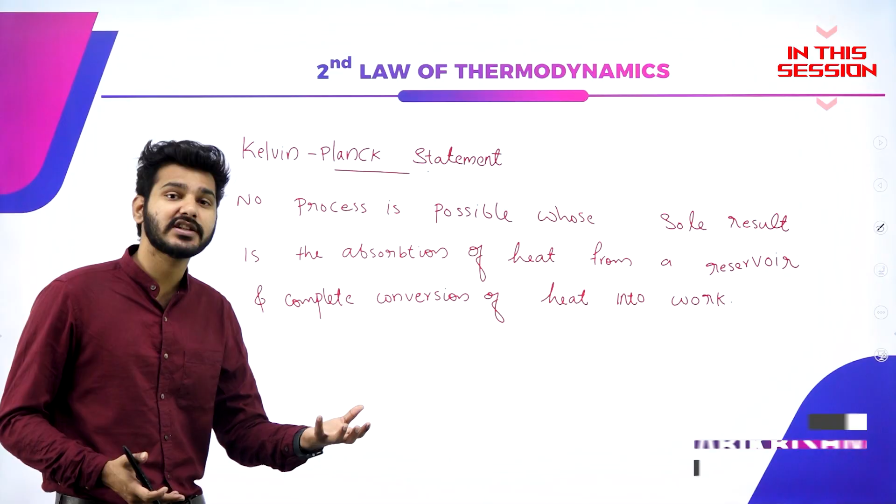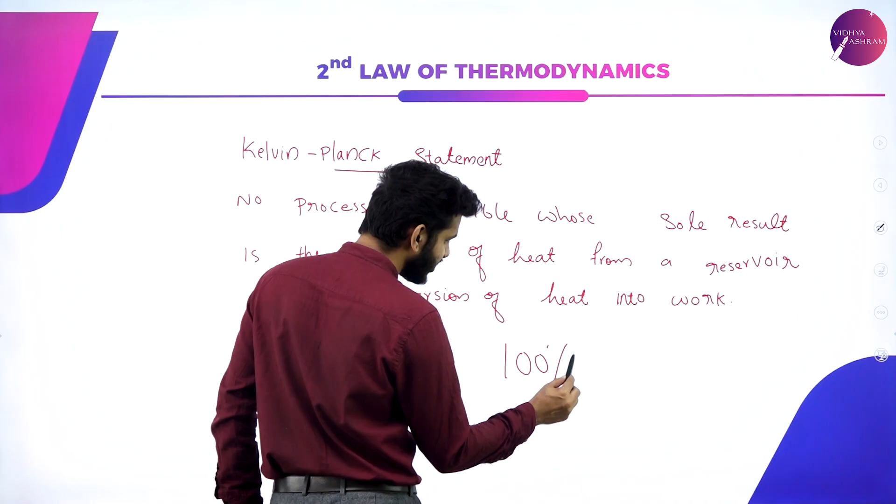That is, 100% of energy cannot be converted into 100% of work. That is, if I give 100 joules of energy, then I cannot expect 100 joules of work to be done. That is because energy will be dissipated.

Like if you give chemical energy to, let's say, a car—you're giving petrol, or let it be an EV car, so we're giving electric energy to that particular EV car. Then what happens? That electrical energy, if you're giving 100% of electrical energy, it is distributed to the motor. When the motor is running, it is actually converting that energy into mechanical energy, but it is not 100% converted. A part of that energy is lost as vibrational energy, frictional energy, sound energy, and other forms of energy.

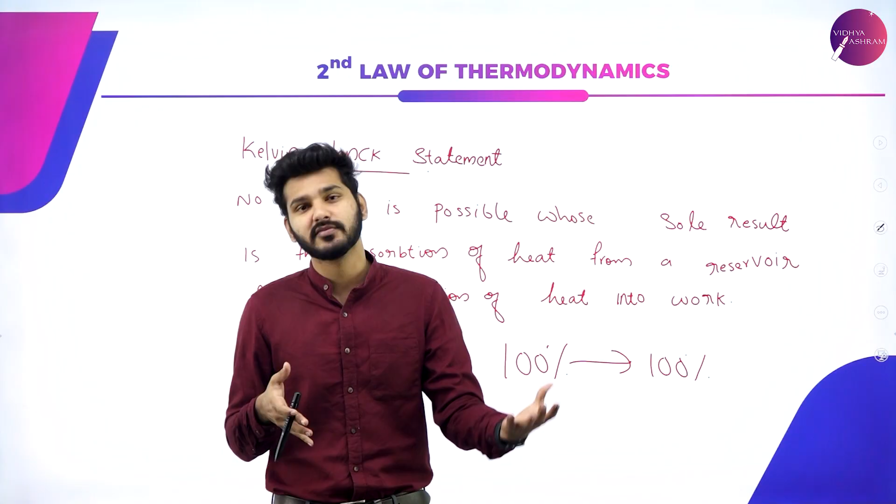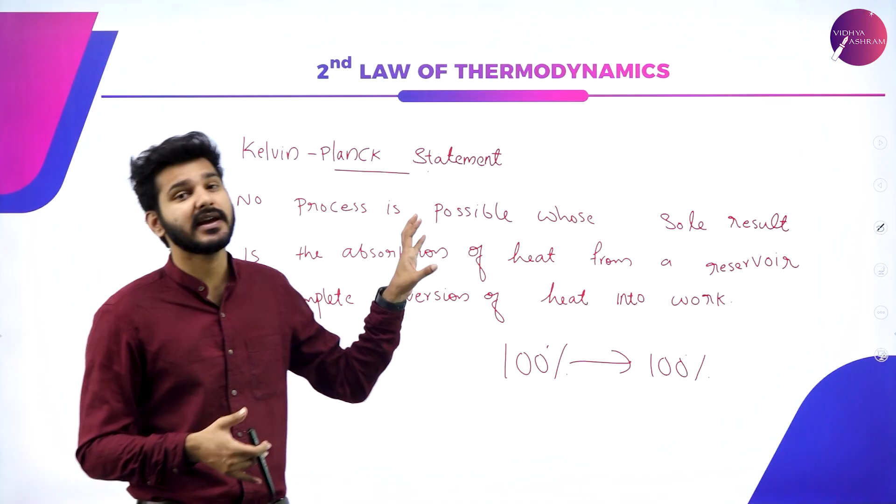So basically, when energy is given to a system, the system cannot use 100% of that energy to do work. There will be different forms of losses, like heat energy dissipation, which is one famous form of loss. So energy cannot be 100% converted into work done. That is explained using this particular statement, the Kelvin-Planck statement.

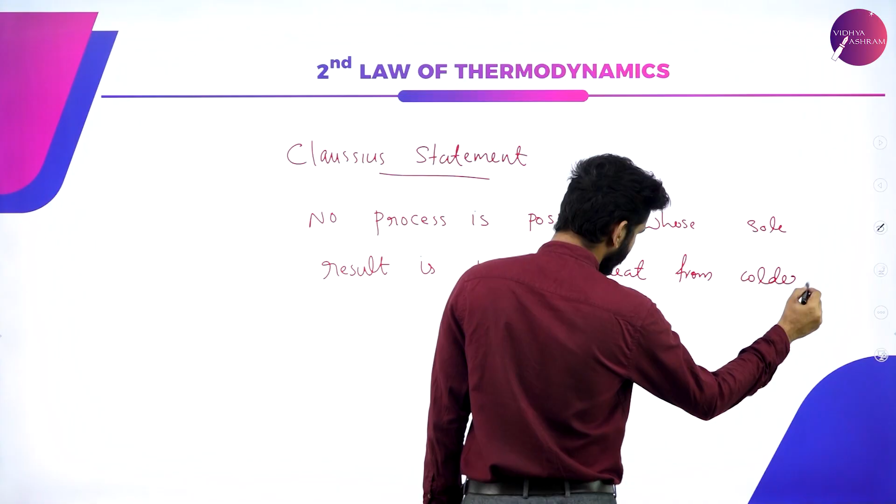And the second statement is known as the Clausius statement, found by Clausius, who stated that no process is possible whose sole result is the transfer of heat from a colder body to a hotter body. That is, if there are two systems and there is a difference in temperature, heat will always flow from the higher temperature to the lower temperature.

If there is a gradient, that is a difference, then heat flows from higher concentration to lower concentration, and the reverse is not possible naturally. We can induce that, like with an AC system, where we can reduce the temperature of a room again and again, but that is by using the compressor and mechanical arrangements. Naturally, it is not possible—heat only travels from higher concentration to lower concentration, and that is known as the Clausius statement.

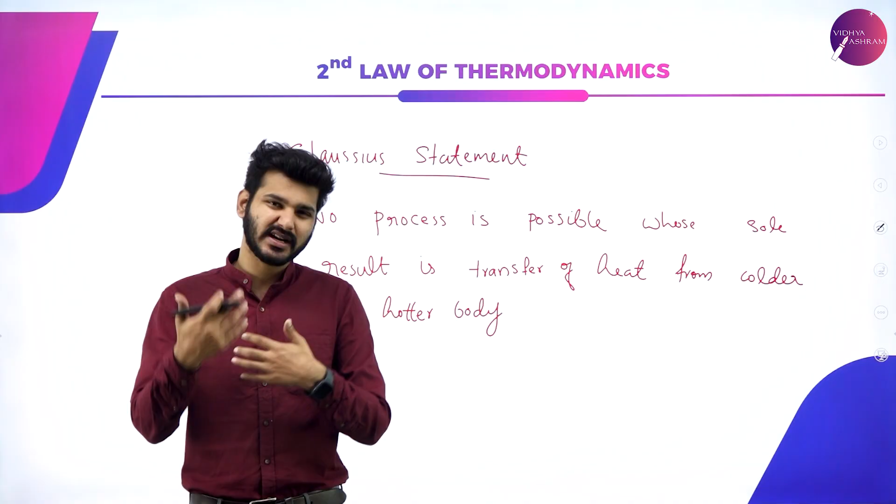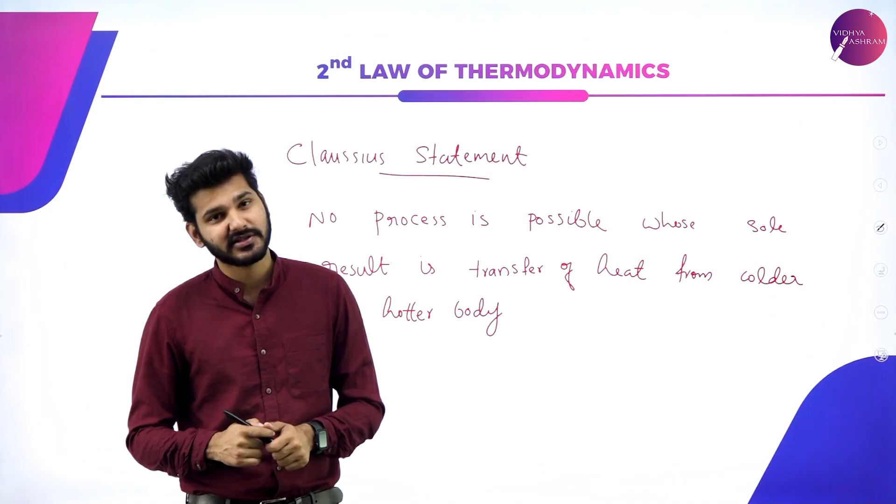So that is enough for you. We don't have to dive deep into the world of entropy, because entropy itself is a very huge topic, so we don't have to dive deep into that particular statements right now. So that was all about second law of thermodynamics.

Now what is reversible and irreversible process? You know that there are many processes, and some are reversible, some are not reversible.

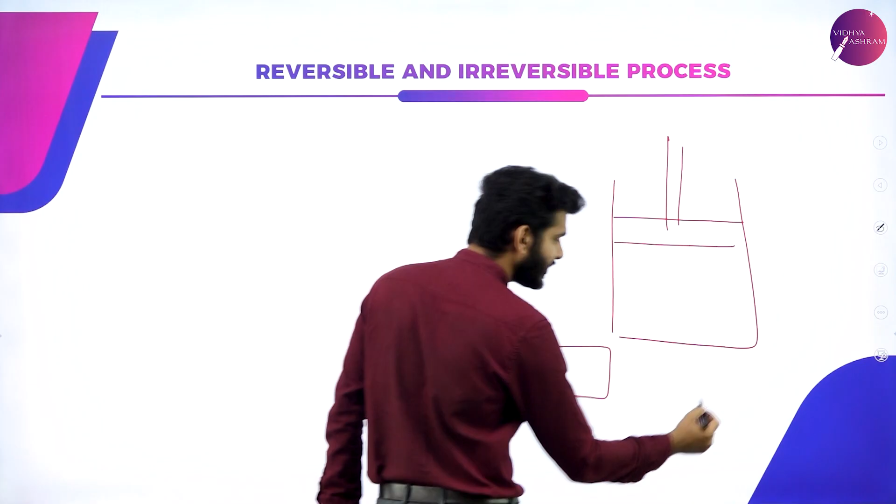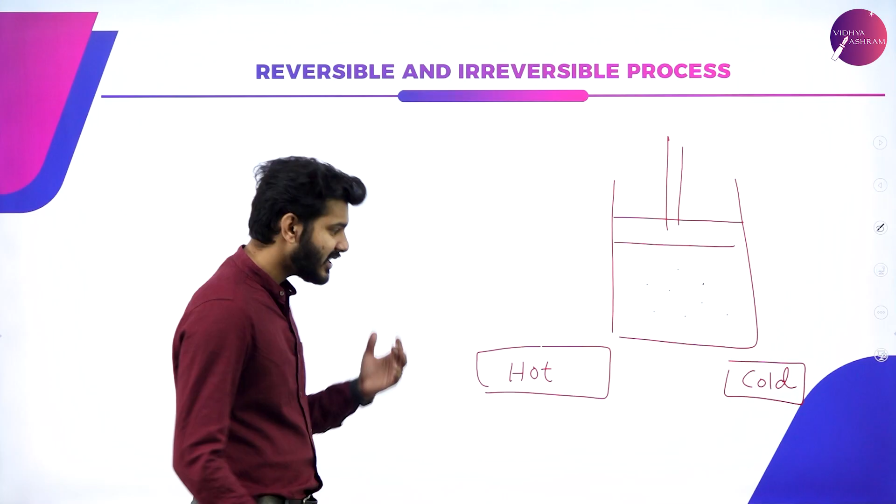For example, if I have a piston arrangement like this, and if I have two bars, let's say this is a hot bar and this is a cold bar. Imagine that this particular cylinder is filled with some gas. Now, if I keep this hot bar under this piston, what happens? The heat from this particular system, that is Q, is absorbed by the chamber, and the gas expands, which means the piston will go up.

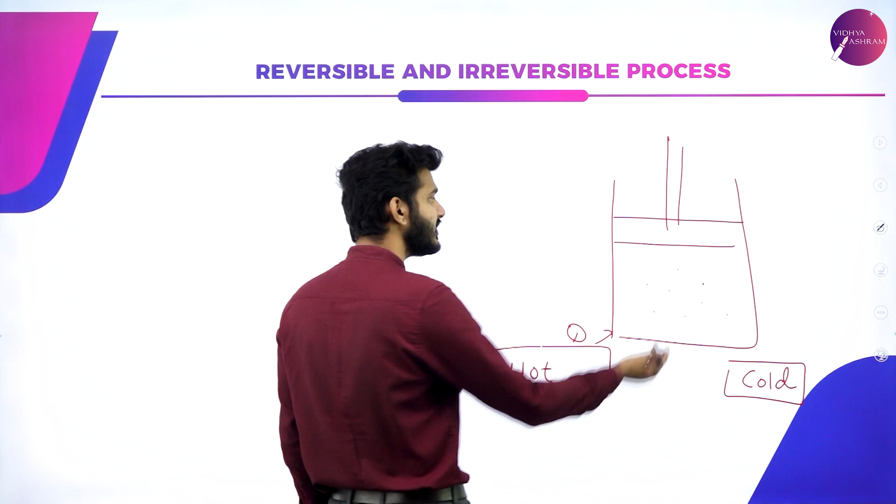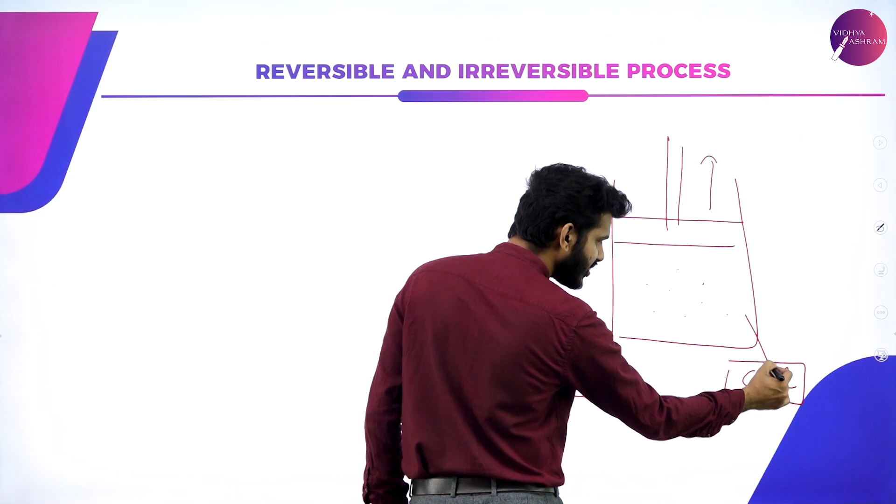Now, immediately if I switch it to a cold bar, what will happen? Then heat from this particular system will reach the cold bar, because of the fundamental laws of thermodynamics, and immediately the piston will come down as the gas compresses because it is losing its energy. The hot bar will give it energy so that it can expand. The cold bar will take away energy from that particular chamber so that it compresses.

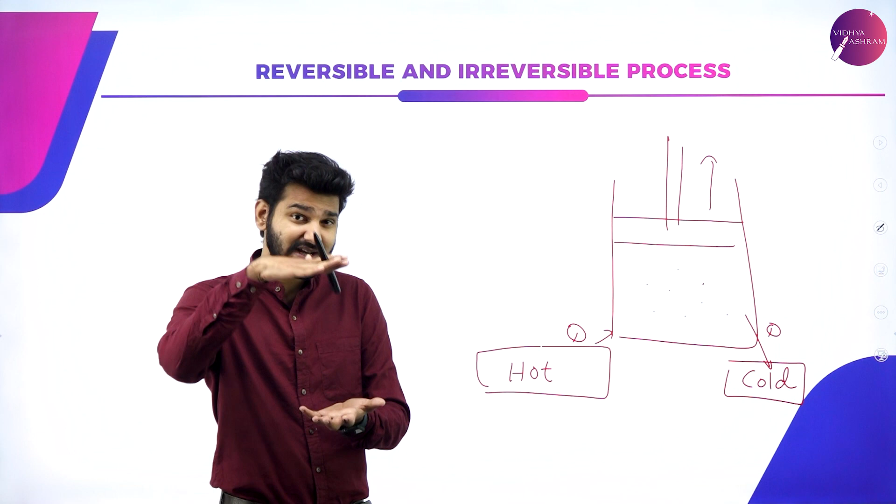So I'll keep the hot bar, it expands. Then I'll remove the hot bar, keep the cold bar, and it compresses. Right? So that is a process that is happening here.

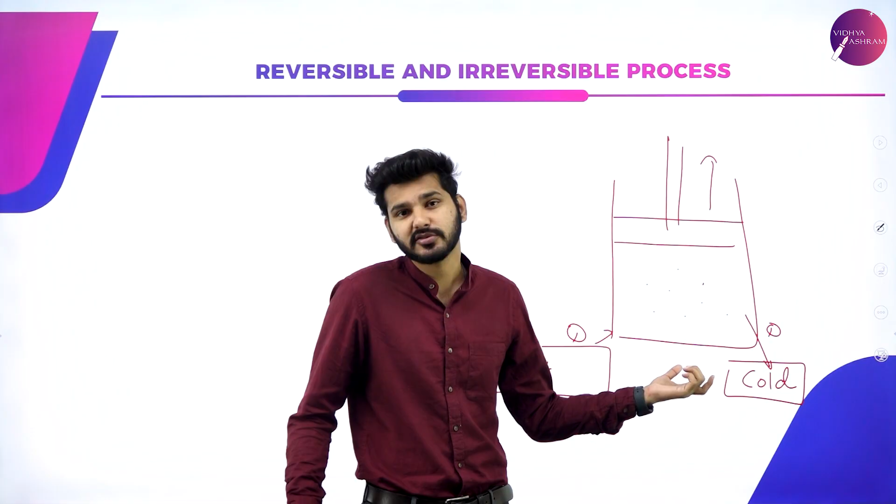Now tell me, if I reverse that particular order, instead of keeping the hot bar first, what if I keep the cold bar first? Then again it is possible, right? Because even if I start from the cold bar, the same thing happens. Again, it compresses. If I give the hot bar, it goes up. So that particular process is reversible. I can do it either in this order or in this order.

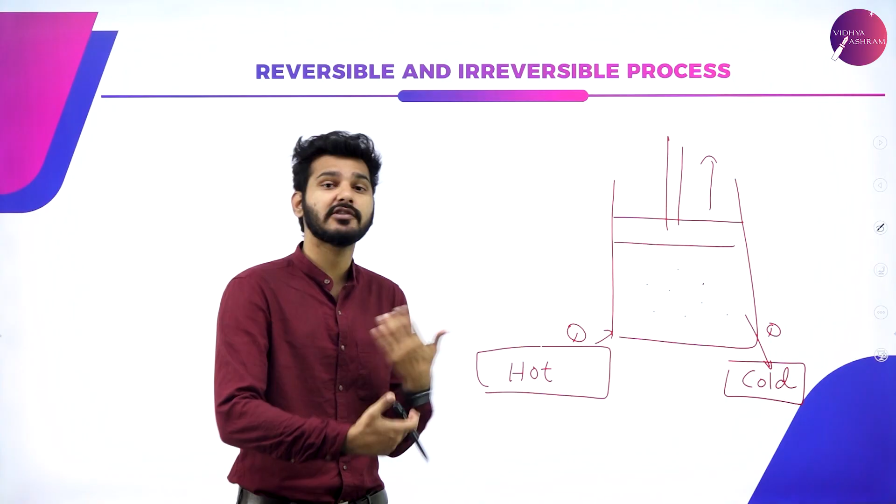Both are possible here. So that kind of processes are known as reversible process, and which is not possible, like if I burn a piece of paper, I cannot unburn it. So that kind of processes are known as irreversible processes.

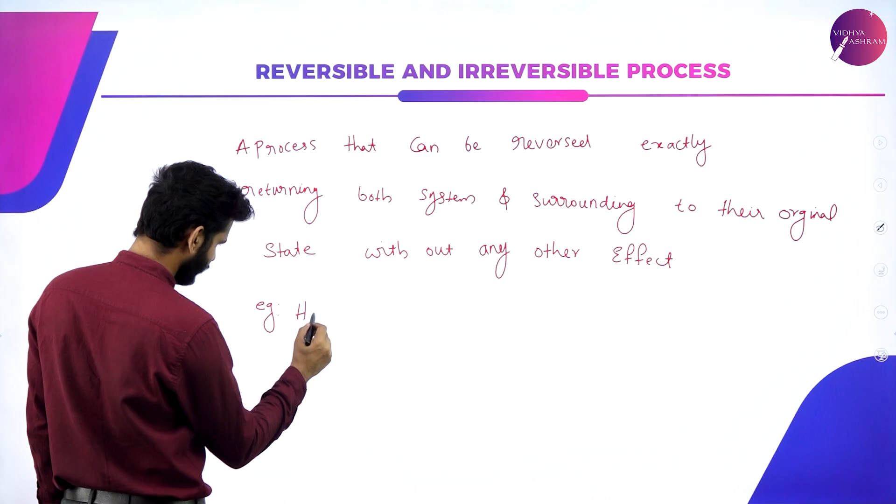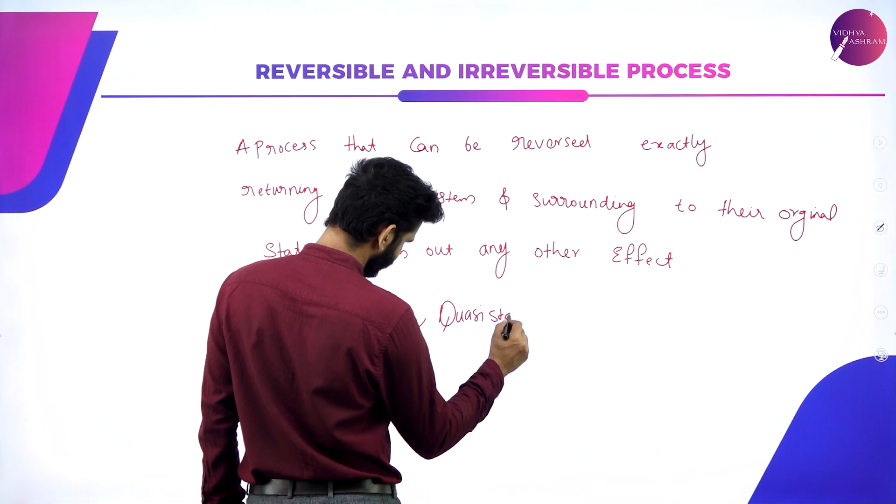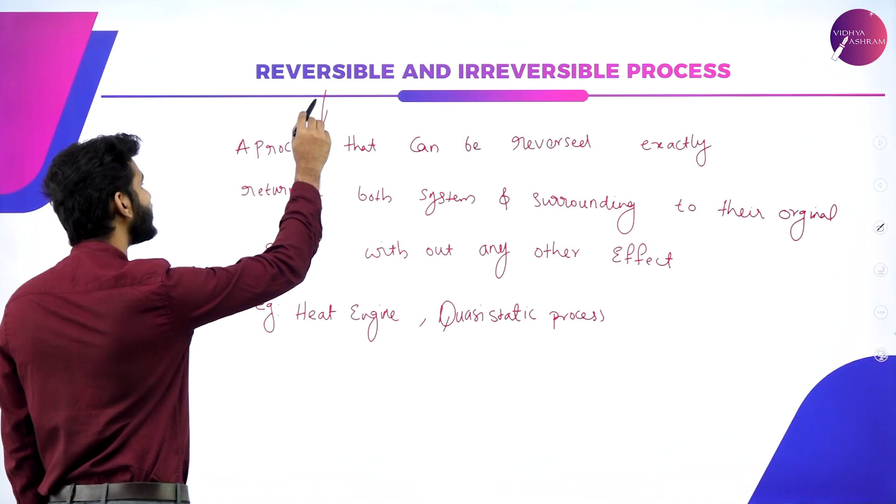So again, we can see that a process that can be reversed exactly, that is, returning both system and surrounding to their initial or original state without any other effect, then that is known as a reversible process. And if the system does not return to its initial state, that is an irreversible process.

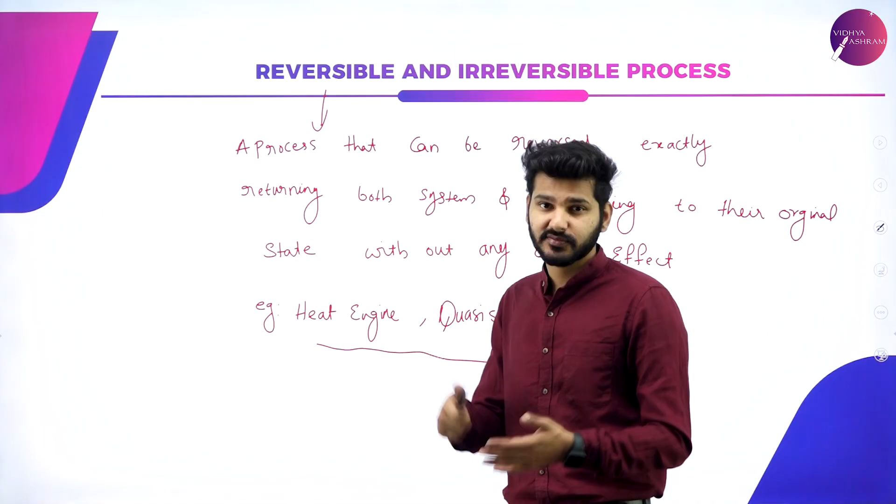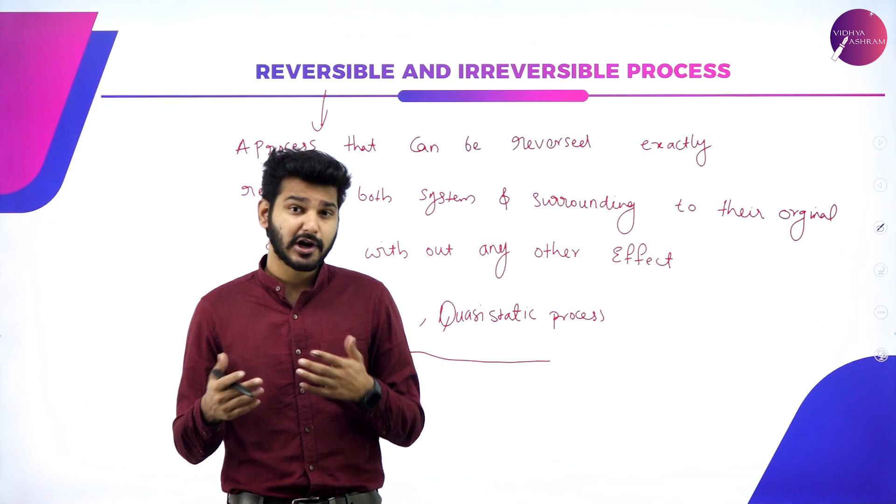The examples for reversible processes are a heat engine, which I'll explain, and a quasi-static process, that infinitely long process we studied about. And for irreversible process, we can say that all spontaneous processes, that is combustion and any other spontaneous process happening in nature, is an irreversible process. It is increasing the entropy. So we can say that all spontaneous processes are irreversible in nature.

So now, what exactly is a heat engine? A heat engine is something that works on the principle of thermodynamics, or simply uses heat to work. For example, you can imagine the engines, that is the steam engines that was used in earlier eras. A train used the steam engine to run.

You might have seen the choo-choo trains which was running on steam engine. Just like that, Titanic also was running on a steam engine. You can see big boilers and steam coming out of it. So that was also running on a steam engine. So all these were based on the heat engine principles.

So what exactly is a heat engine and how is that related to our thermodynamics chapter? Just before, I showed you an example where the piston goes up and down when it came into contact with something hot and something cold. So that particular process itself is the working of a heat engine.

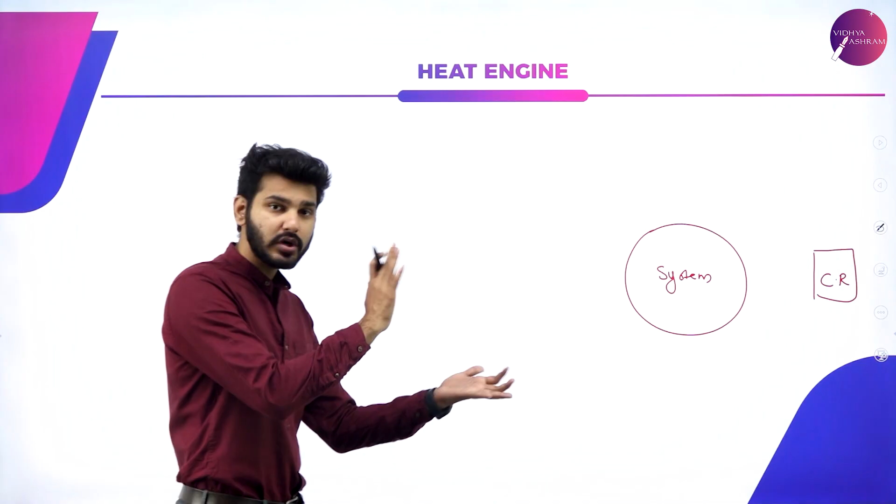If you have a system like this, let's say this is your system, this is your cold reservoir, that is your cold part, and this is your hot reservoir, where heat is being supplied, then we can say that the system can absorb Q1 amount of energy, or Q amount of energy, from this particular hot reservoir, and this energy will be used in order to do some work. That is, the system will do some work.

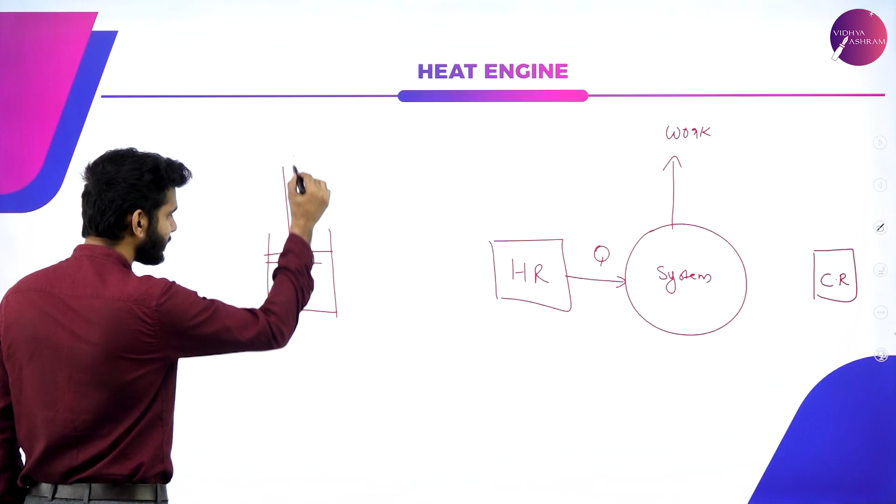Let's say this is the exact arrangement - this is a piston, and here it is filled completely with gases. I'm bringing a very hot body in contact with this piston, so the gases expand. When the gases expand, the piston moves up. If I connect this piston to some other arrangement in order to lift something...

To lift this particular load, if I connect this, then what happens? As the piston moves up, this rod moves and the load will be lifted. So just like that, I am doing work on the surrounding, or making the system do a particular work, and that is achieved by giving energy to this system.

So again, I can say that the hot body gives Q amount of energy to the system, and that energy is used to do some work. Now, this is going up, but I want to put it down now. So what will I do? I have to move the piston down.

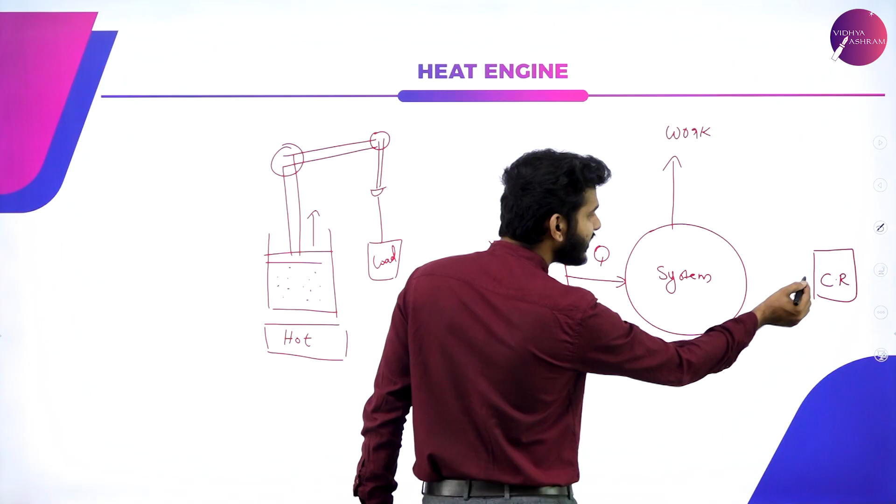So what can I do? I have to compress the gases. That is where the cold reservoir comes into play. It absorbs energy from this particular system. The system now gives Q dash, or Q1, amount of energy to the cold reservoir so that the entire piston compresses.

So the system gets energy from the hot reservoir, goes up and does some work, and then when you bring the cold reservoir in contact with the system, a certain amount of energy is absorbed by the cold reservoir and the piston comes down. This process can be repeated, so you have a perfectly good working engine.

But the only problem is that this is an ideal engine, because you don't have perfect temperature to produce that effect. Yes, you can heat a system to 2000, 5000, or 10,000 degrees Celsius - that's fine, you're heating it so hard it goes up a really long way. But to produce that perfect temperature exchange, in order to bring the piston down, it should compress really well, meaning a perfect level of coldness should be supplied.

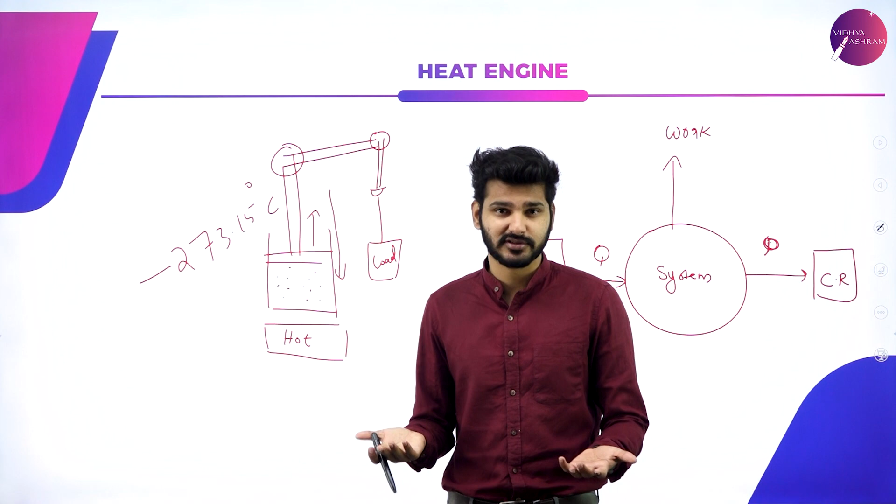That is absolute zero - that concept also came from this heat engine. So the concept of absolute zero is not practically possible, because the absolute zero value is minus 273.15 degrees Celsius, and that is not really attainable. Zero degrees Kelvin is not attainable by our standards, and it is very difficult. So it is not practically possible, but theoretically it is a very good engine.

This was actually found out by Carnot - he was a French physicist, and that's why this is known as Carnot's engine, which we will study very soon. The working of a heat engine, this concept, was observed and tried to be applied by Carnot, which he failed miserably, but again the concept was brilliant.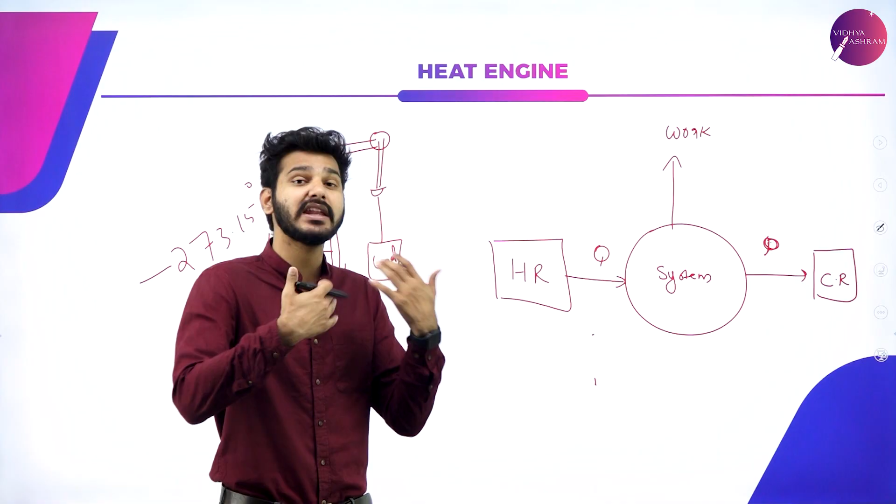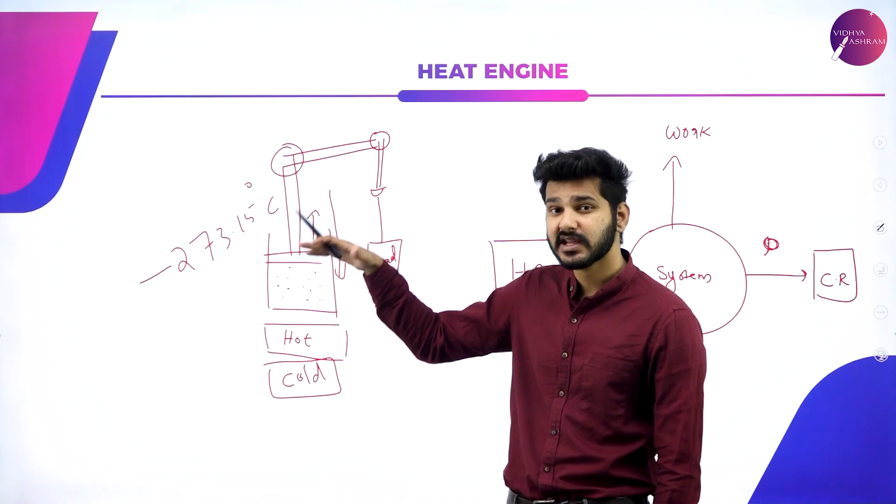Let's see how that process can be converted, or simply how he idealized how that heat engine would work - without any energy loss, how would that system work? Carnot imagined that the piston will go up and down if I keep on exchanging hot and cold baths, perfectly compressing and expanding the system. Then I have a very good heat engine, better than all the steam engines out there, because the steam engines provided an efficiency of only 16% or something.

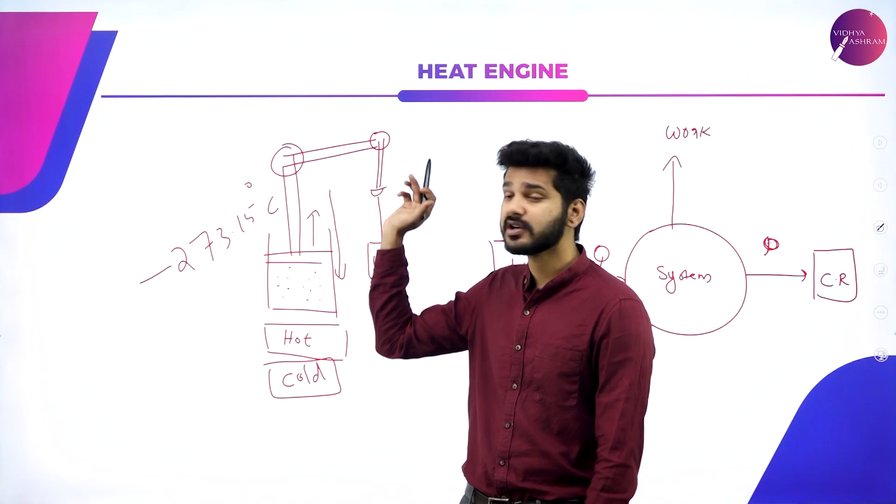So this heat engine would provide an efficiency of 100% because all the energy put into the system is now being converted into work. He forgot to account for friction, mechanical wear and tear, vibrations and other energy losses. So he assumed he'd disregard all of this because his entire energy would be converted into work - that was not actually possible, and even now that is not possible.

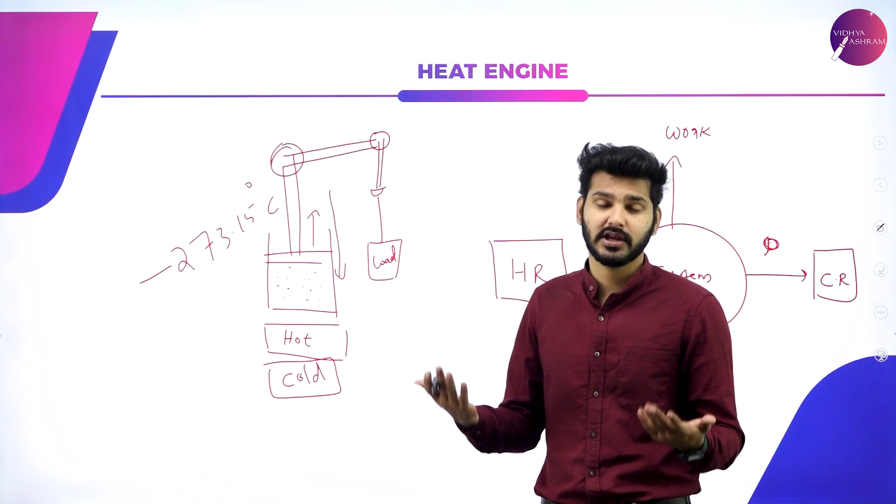But this was a theoretical concept which other scientists like Lord Kelvin also contributed to, and that is how the branch of thermodynamics actually bloomed. So how this system should have worked according to Carnot is what we are going to study here. Let's imagine we are inside Carnot's head studying how this system works - an ideal heat engine which converts 100% of energy given to that system into 100% work.

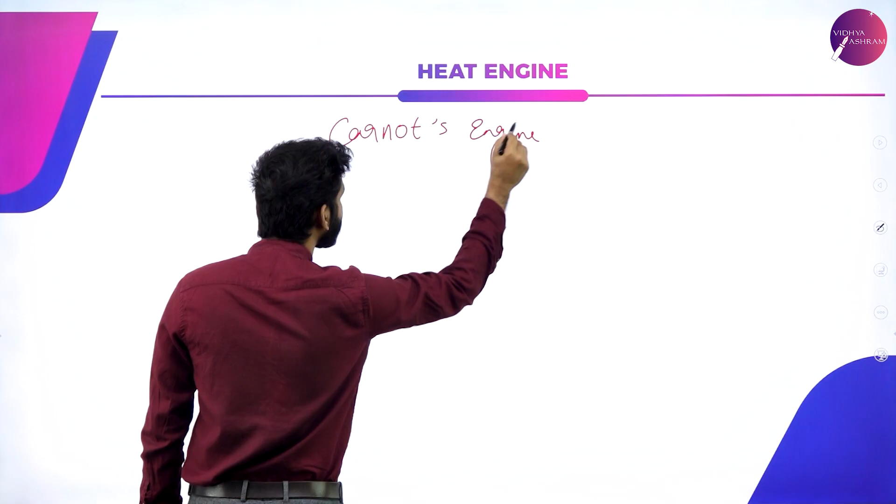So how does that ideal heat engine, or Carnot's engine, actually work? The first step is expanding the gas, and the expansion should be isothermal. So the first step in constructing Carnot's engine is that we have to expand the gas, and that is isothermal expansion.

So the gas is going to expand isothermally. The gas is absorbing Q1 heat from the hot reservoir at temperature T1, and it is expanding.

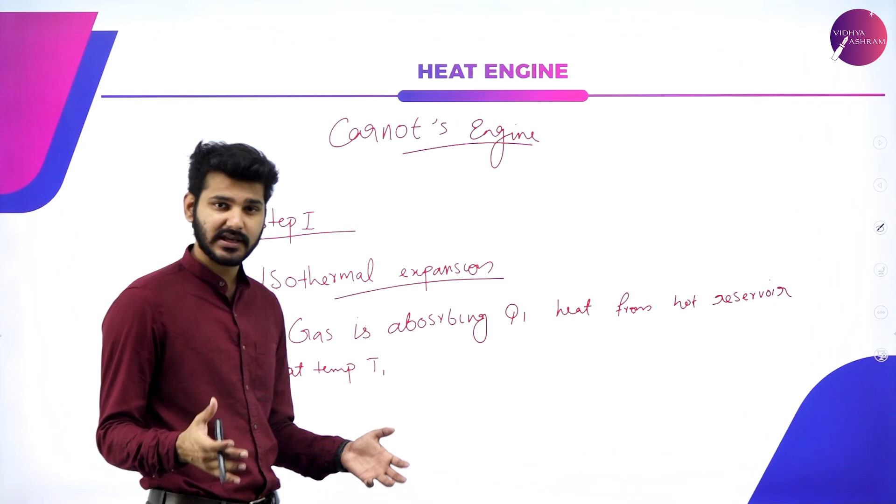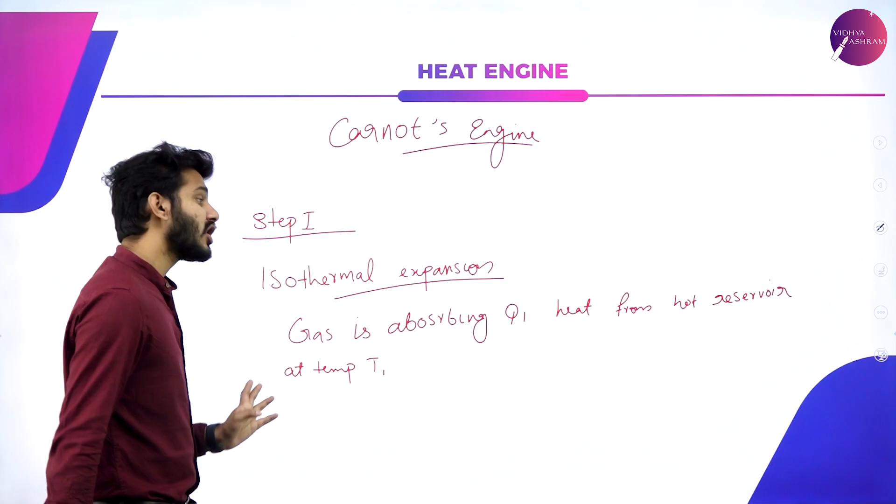So again, we are using heat to do work here. We are giving heat to a particular system and the system is doing work. Up to this point, we were doing work and getting energy instead. Now we are going to see how we can give energy to a system and the system is going to do the work, which means we can write down the equation for work done.

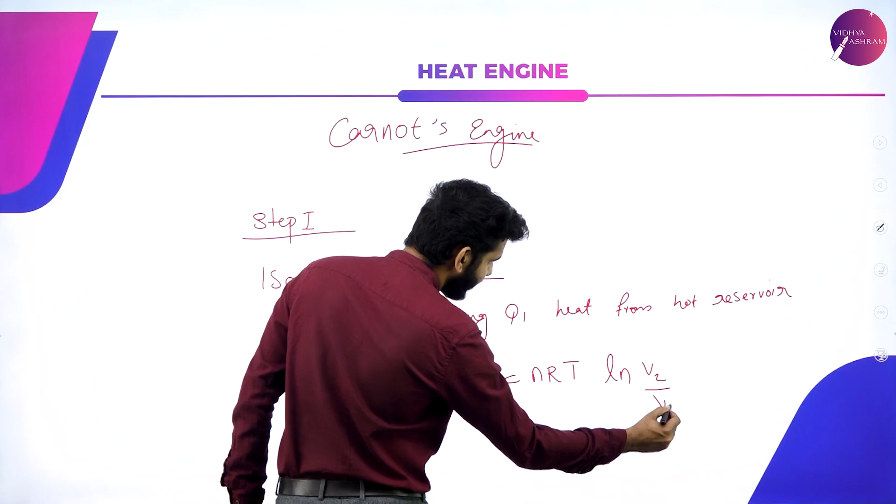That is the first work, isothermal expansion, given by the equation we studied earlier: nRT ln(V2/V1). This is happening at temperature T1, so nRT1 ln(V2/V1) is the equation for isothermal expansion.

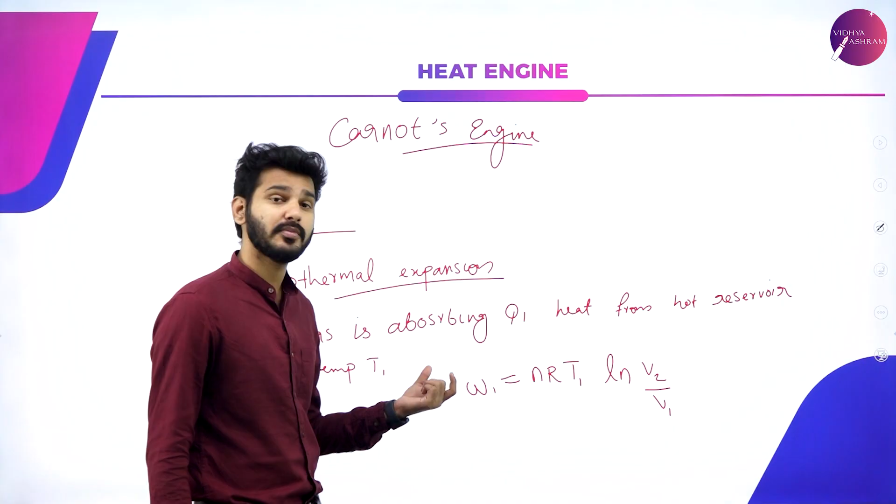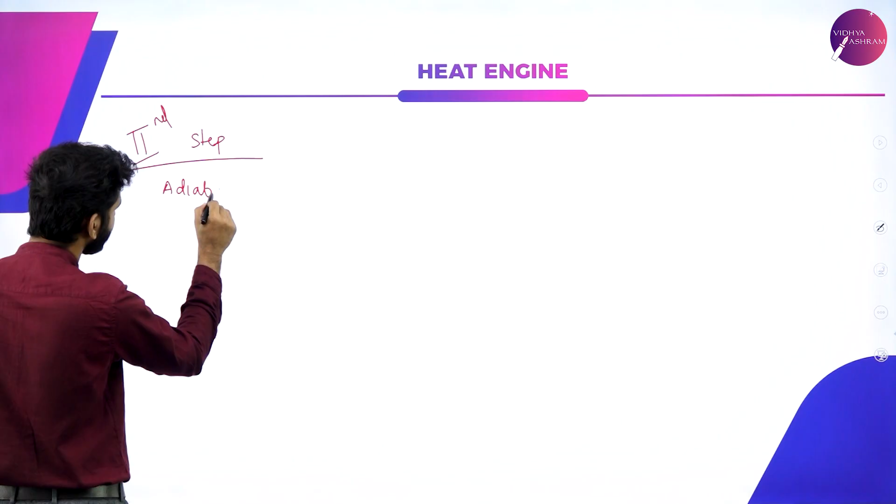The second step is adiabatic expansion, which keeps the energy constant. Now the gas is going to expand adiabatically, meaning the energy exchange is zero. The temperature is going to change, but the energy remains the same. Again, imagine we are going to predict how the system works.

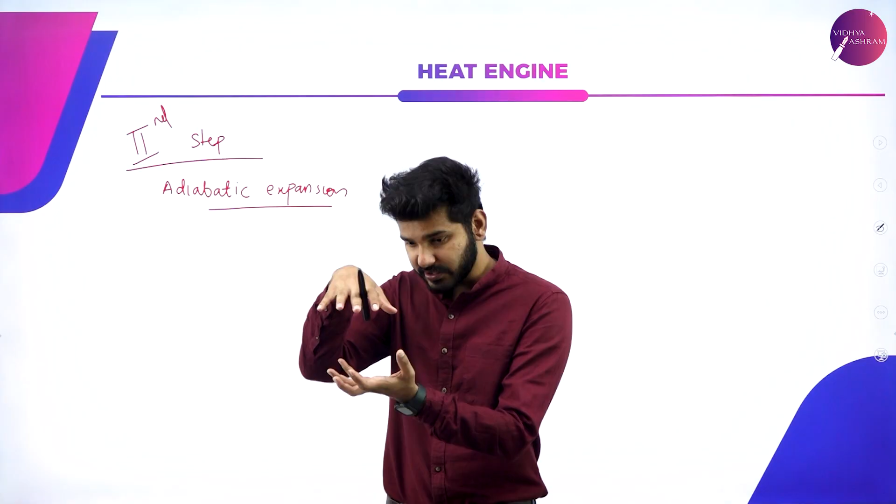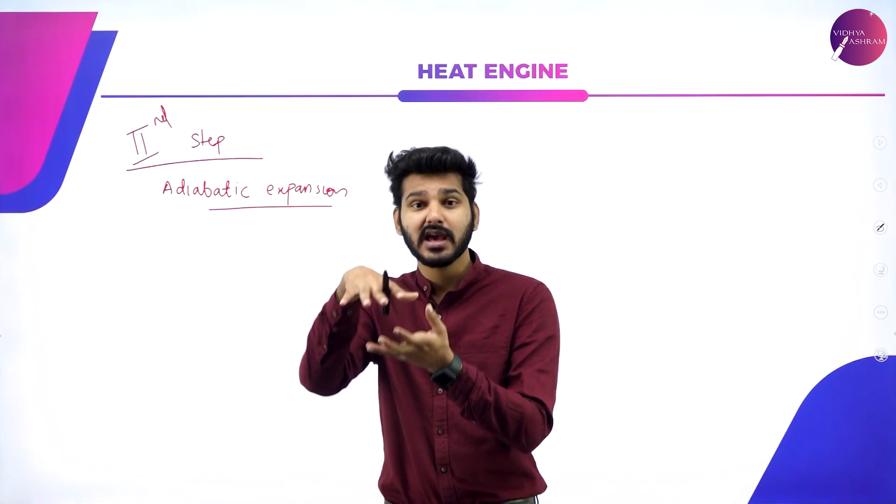There was a gas in a container, and when you apply heat to that system, it expands. That expansion was initially isothermic, meaning the temperature remains constant. It is a very slow process - an isothermal process. After that, it is an adiabatic process, meaning after expanding without changing the temperature, now we are expanding without changing the energy - the temperature is changing, but the energy remains constant. So that is the expansion part.

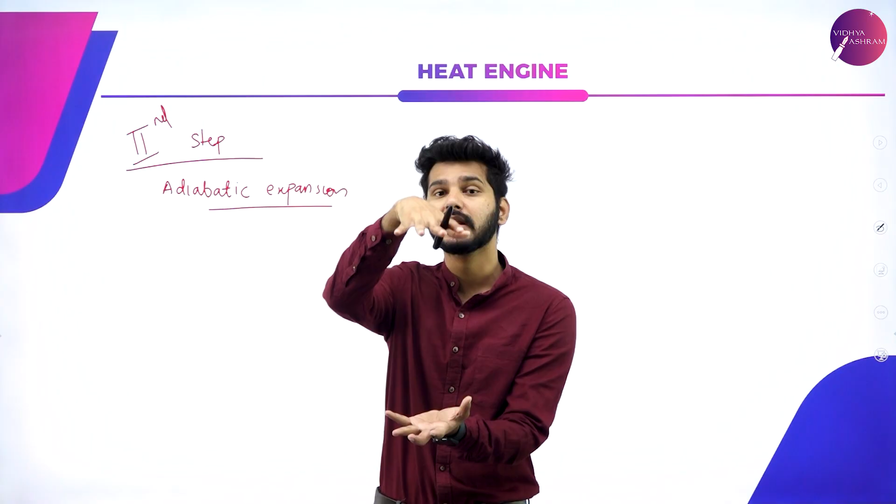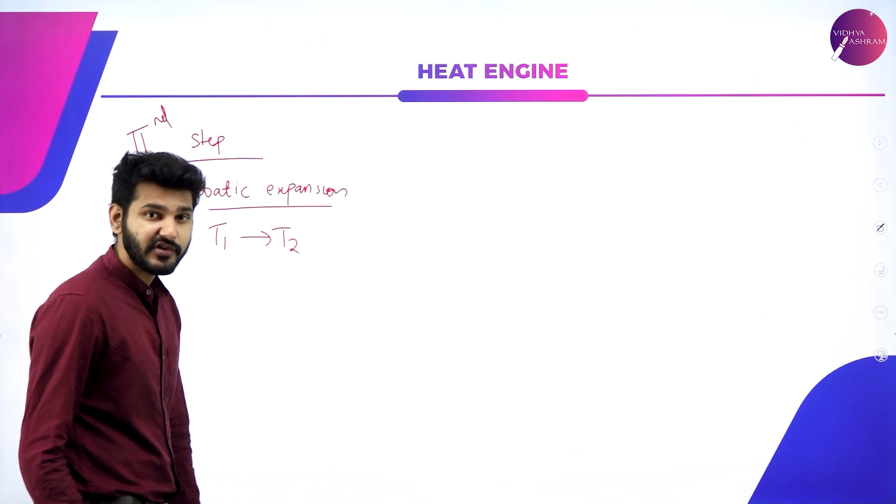So the piston is going up like this. Two processes are happening: isothermal expansion and adiabatic expansion. Here the gas expands adiabatically from temperature T1 to temperature T2, and again it is doing work. That work done is given by W2, which is equal to nR(T1 minus T2) divided by (gamma minus 1).

Now again, these two processes are about expanding - the gas expanded inside the piston, causing the piston to go up. That is half of the process. Now the piston has to come down, meaning the process has to repeat on itself. That is why the heat engine is a reversible process - you can do this either way. Both are possible. So the piston has risen up right now.

Now it has to go down, meaning the expansion part is over. Now it has to go to the compression part. How does that compression happen? Just like before, whatever happened this way, we are going to do the other way around - instead of isothermal expansion, now it is going to be isothermal compression.

So the third step is isothermal compression. What exactly is happening here? The Q2 amount of energy - initially Q1 energy was given to the system, some of that energy was used to do work, and the remaining energy, Q2 amount, is now given to the cold reservoir.

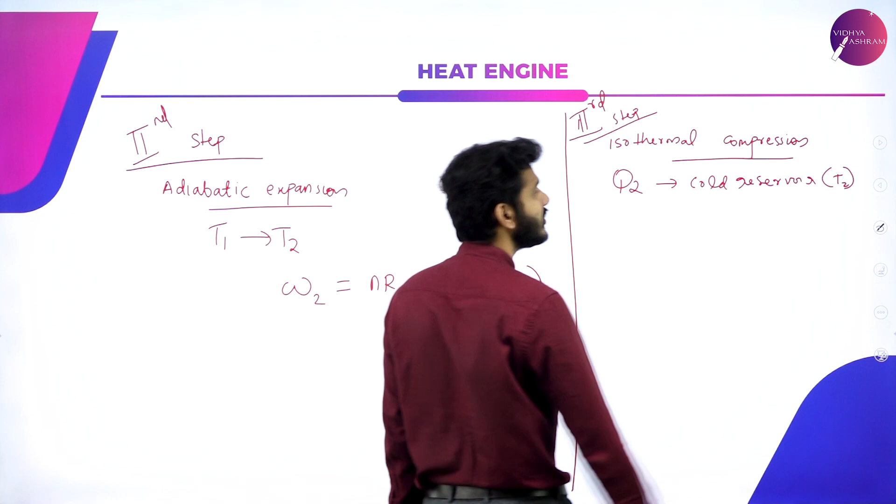Remember, when the cold reservoir is in contact, the piston is moving down. Q2 amount of energy is given to the cold reservoir, which is operating at temperature T2. Then we can say that work done W3 is equal to nRT2 ln(V4/V3).

Finally, what is the last step? That is step number 4: adiabatic compression. Again, in adiabatic compression, temperature is changing but the energy remains constant, which means the work done W4 will be equal to nR(T2 minus T1) divided by (gamma minus 1).

So these are the 4 equations for the work done in a heat engine. In our ideal heat engine, these 4 processes will be responsible for the work done - the piston expanding and compressing. What is all happening inside that particular piston? There is an isothermal expansion, an adiabatic expansion, then an isothermal compression, and then an adiabatic compression.

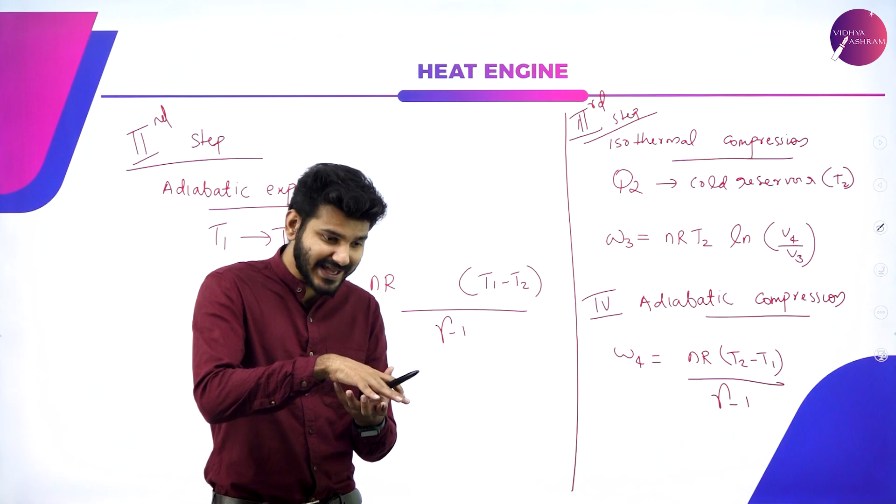When the energy is absorbed from the hot reservoir, the piston is expanding isothermally. There is an exchange of energy there, but the temperature is remaining constant. And then it is expanding adiabatically. The energy is remaining constant, but the temperature is changing. And after that, the piston has gone up.

Now it has to come down. So in order to make it come down, that is, the piston went up, did some work. Now the piston has to come down. So we introduce a cold reservoir. When we introduce a cold reservoir, there is isothermal compression. That is, energy is now given to the cold reservoir. Q2 amount of energy is now given to the cold reservoir, and now the temperature is same.

After that, when the energy exchange is over, we have an adiabatic compression. That is, temperature is now changing, but the energy exchange is no longer there. So that is the entire process of a heat engine. So essentially, we have different forms of work here, that is W1, W2, W3 and W4. And if we add all these individual works together, we will have a net work that is done. So we also have to find out what is that particular net work done.

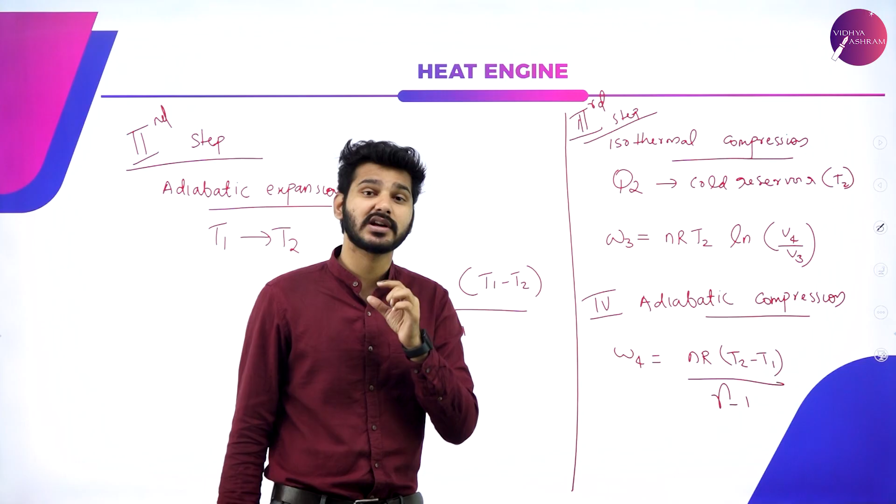But before that, graphically also we can represent this particular process. So if I draw a graph, that is a PV graph, because P delta V is again work done, or PV is just work done in thermodynamics. So any area under this graph will give work done. So we can use a PV graph in order to represent what happens inside a heat engine.

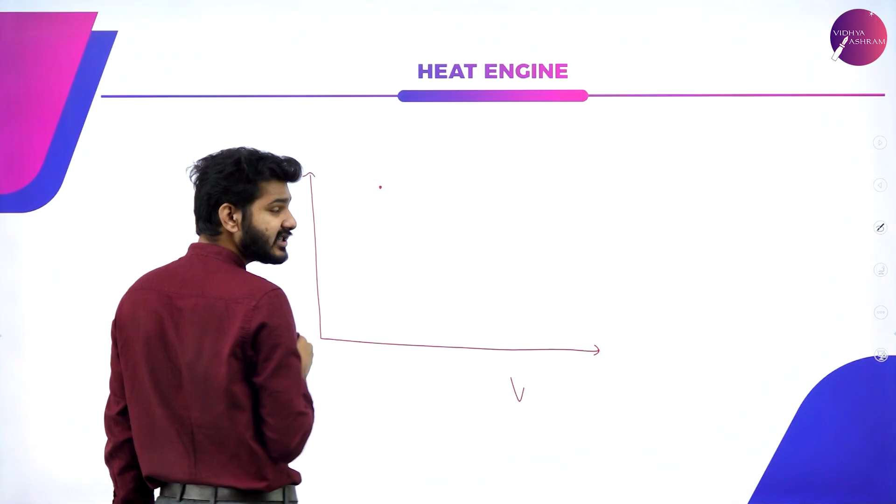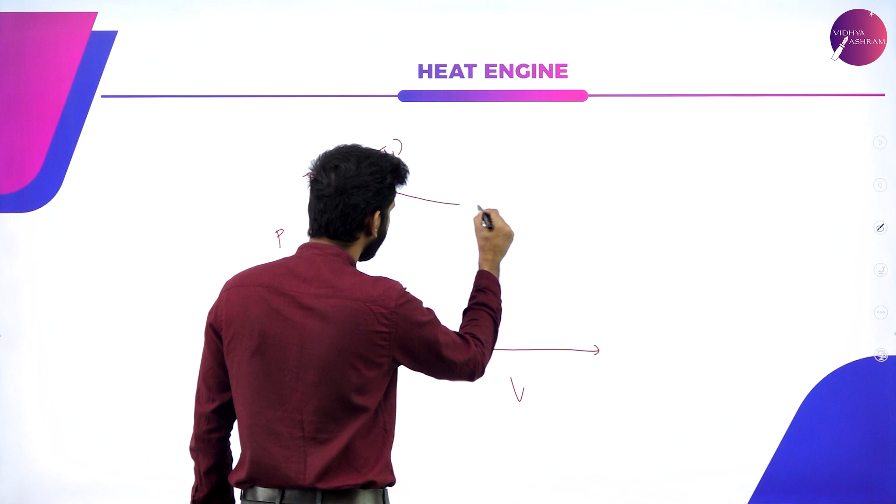So what happens initially? Initially it is isothermal expansion. That is, here it is P1, V1, T1. And now it is expanding isothermally. So it is expanding. Expanding means pressure is changing, volume is also changing. The change in pressure is comparatively low because temperature is remaining constant, but the volume is changing. So from P1, V1, T1 to P2, V2, T1, the gas expanded isothermally.

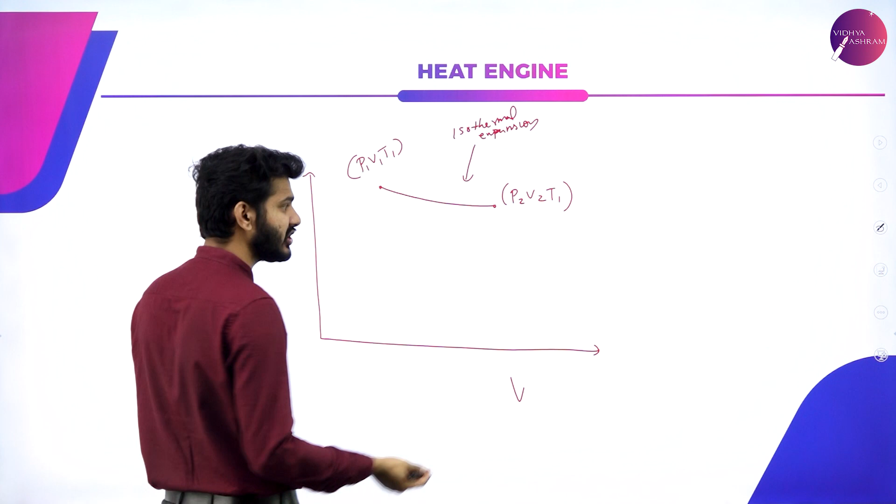So this expansion part is isothermal expansion. And now this is isothermal expansion. And the next step is adiabatic expansion. So what happens in an adiabatic process? The pressure, volume and temperature altogether change. But it is not a drastic change. So it is going to be a small change like this one. So here we have P3, V3 and T2. So this is adiabatic expansion.

Now again, what happens? This is the part where the piston goes up. Now the piston has to come down. So when the piston comes down, the volume changes. So we can see that after this, there is isothermal compression. So isothermal expansion was like this. So compression will be like this. So here it is isothermal compression, which means that it is now at P4, V4, but temperature remains constant.

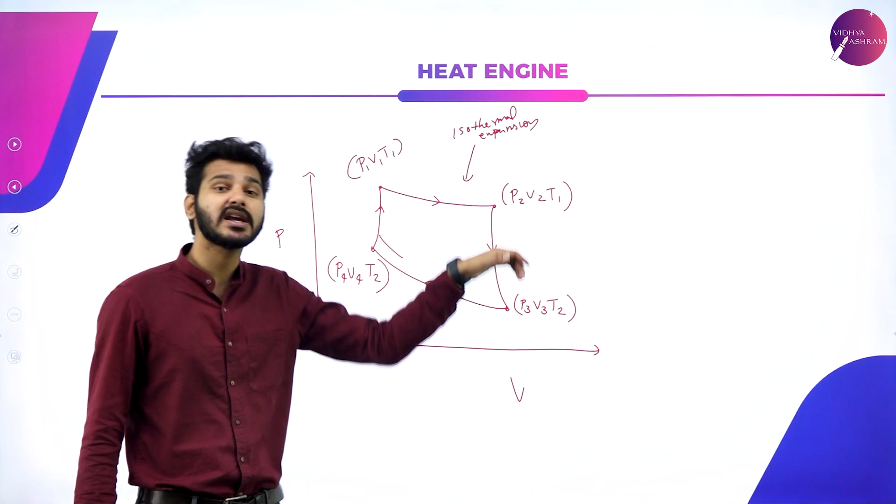So this is it. And finally, there is also adiabatic compression. So here we have adiabatic compression. So initially it was isothermal expansion, adiabatic expansion. Now it is isothermal compression and adiabatic compression. So this entire cyclic process completes the heat engine's work done, or simply the processes that is happening inside a heat engine.

Now we also have to find out what is the net work done, and that is W net, which is equal to W1 plus W2 plus W3 plus W4. That is isothermal expansion work done, adiabatic expansion work done, isothermal compression work done, and adiabatic compression work done. So if you add up all these works together, we will get what is net work done.

The only problem is that you have to watch for the sign, because initially, even though it was a positive sign, that is positive work done, it is happening in one direction. It is that the work is done by the system, so we are taking it as positive. But when the work is done on the system, we'll take it as negative. So when it is coming down, that is when it is isothermally compressing, we'll take it as negative, because again, work done by the system is positive, work done on the system is negative.

So which means that W4 is actually negative, and this will be equal to W2, because both are adiabatic processes. That is, the equations for W2 and W4 are very similar. The equation is NR into T2 minus T1 divided by gamma minus 1 for W4, and NR into T1 minus T2 divided by gamma minus 1 for W2, which means that if I take a minus sign common for W4, both the equations are same. So I can simply say that W4 is equal to minus W2, or simply minus W4 is equal to W2.

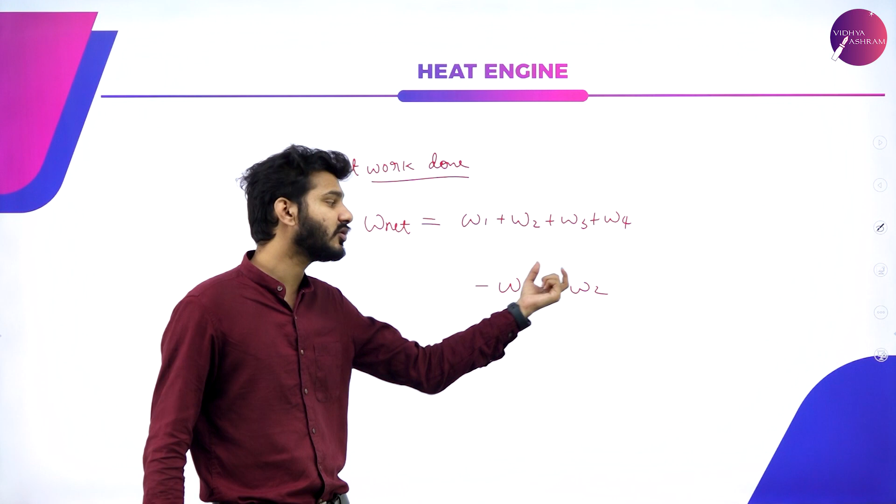So I can write this particular equation as W net as W1 plus, instead of W2, I can write it as minus W4, or I can also write it as W2 only and take W4 as minus W2. I can write it in both ways, both are same, so W2 and W4 cancel each other out. The work done during the adiabatic process, that is during compression, cancels with the work done during adiabatic expansion, and the only thing we have remaining is W1 plus W3.

So this W1 plus W3 can be written down as nRT1 into ln(V2 by V1) plus nRT2 ln(V4 divided by V3).

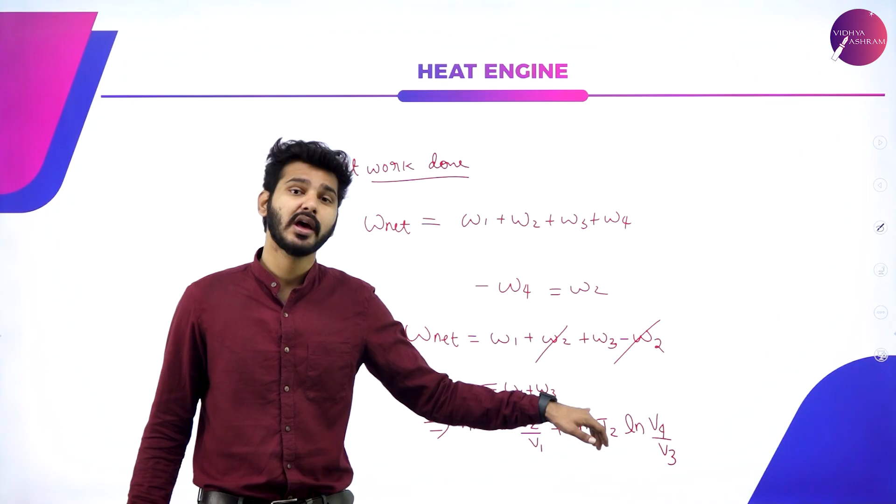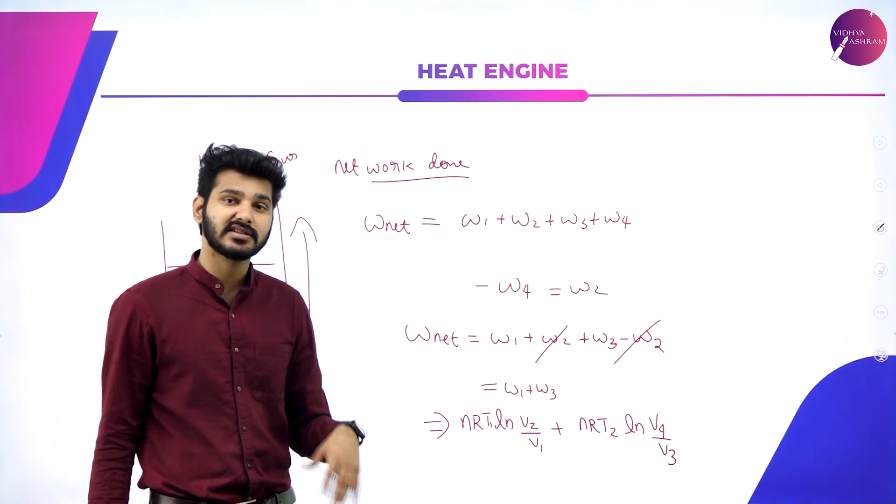Then again, you have to remember that W3 is also negative here, because you have to remember which process is positive and which is negative. When the piston is going up, we are doing work by the system, so when the piston is going up, all works are positive, meaning the expansion stages are positive. But during the compression stage, the surrounding is doing work on the system, so since the surrounding is doing work on the system, we take it as negative. During compression stages, we take both as negative. So we can say that this particular quantity, W3, is considered negative.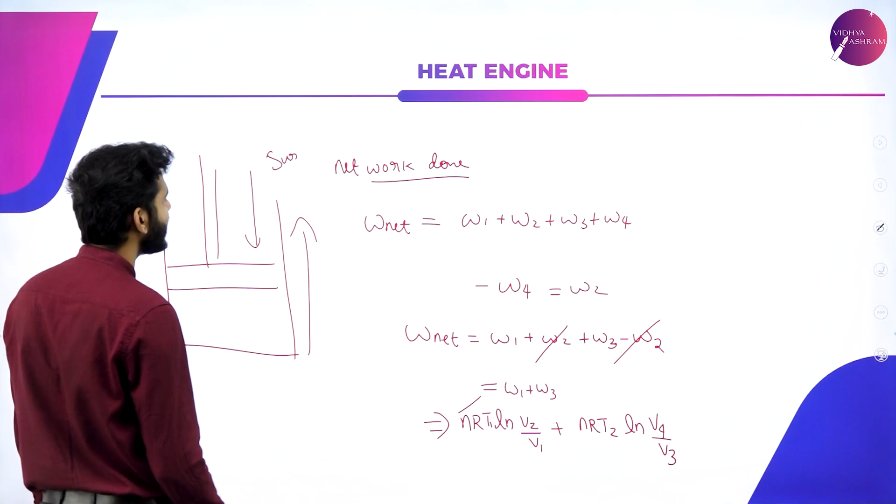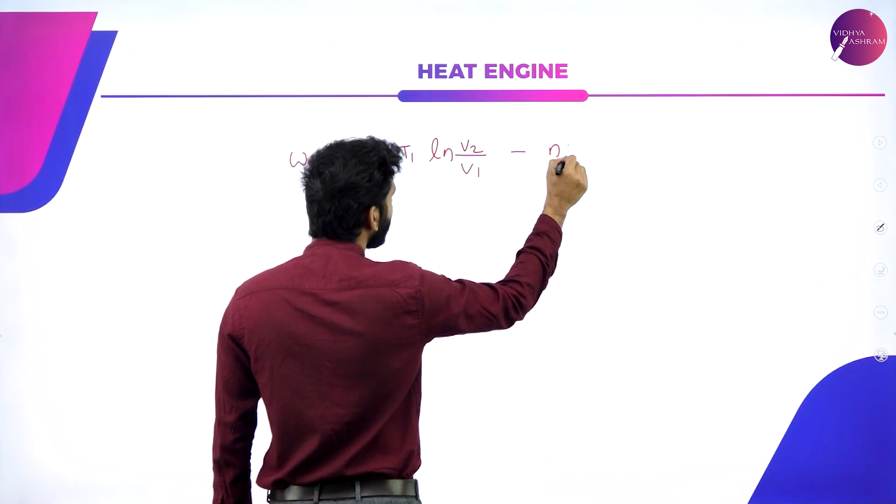Then we can simply write W net is equal to nRT1 ln(V2 by V1) minus nRT2 ln(V4 by V3). You can take the nR's common, but up to this point is also enough.

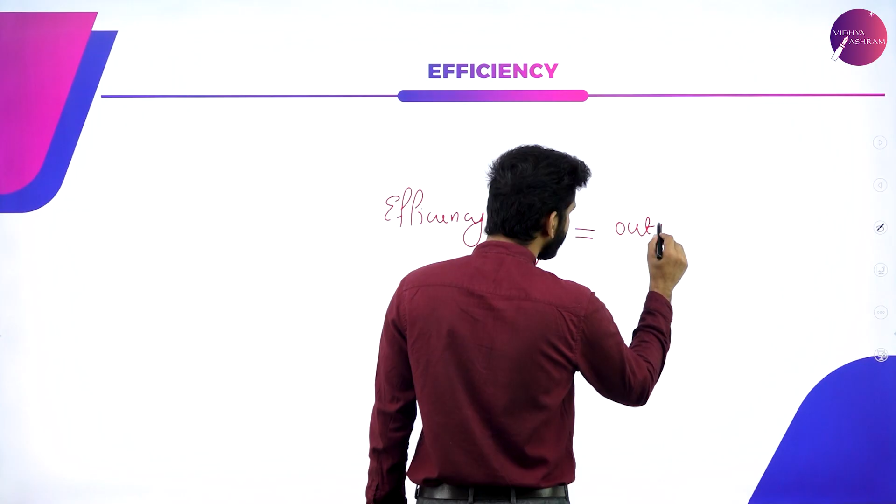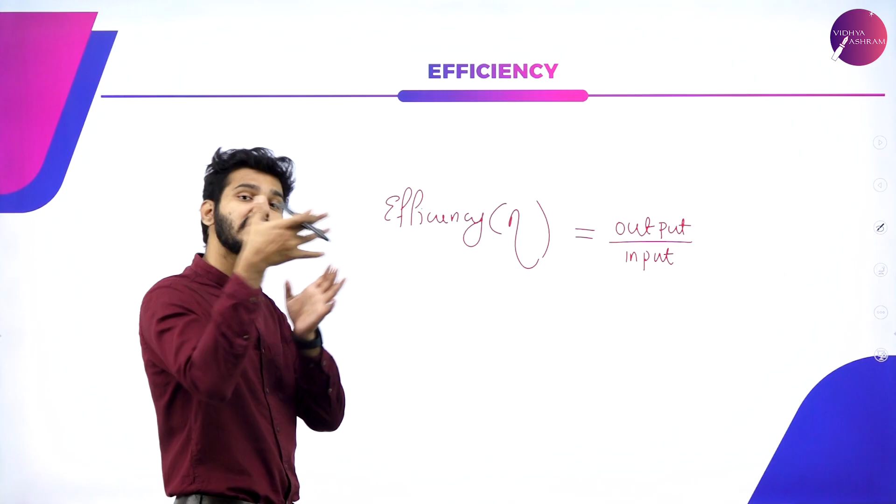And the last part we have to do is find the efficiency of this particular heat engine. Efficiency is indicated by the Greek letter eta. It is actually a ratio of output power to input power, that is, how much we are inputting and how much output we are getting for that input. So output divided by input is the efficiency of a system. If you're giving 100% fuel or energy to a particular system, how much of that energy is it able to convert into work? That particular measurement is known as efficiency.

In this case, in a heat engine, the output we are getting is work done, and the input we are putting is Q1, the heat we are supplying to that particular system. So work done by the energy supplied gives our output. Work done can also be written as the change in energy, that is, how much energy we have given minus the particular difference that is remaining will give us the work done. So from the initial energy given to the system and the energy returned to the cold reservoir, if I take the difference, I'll automatically get the energy used for work done, so this equation will give me the work done.

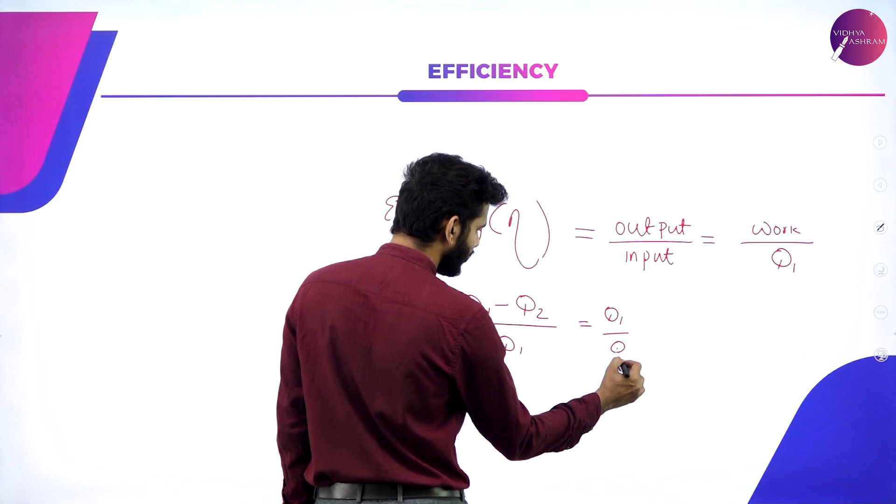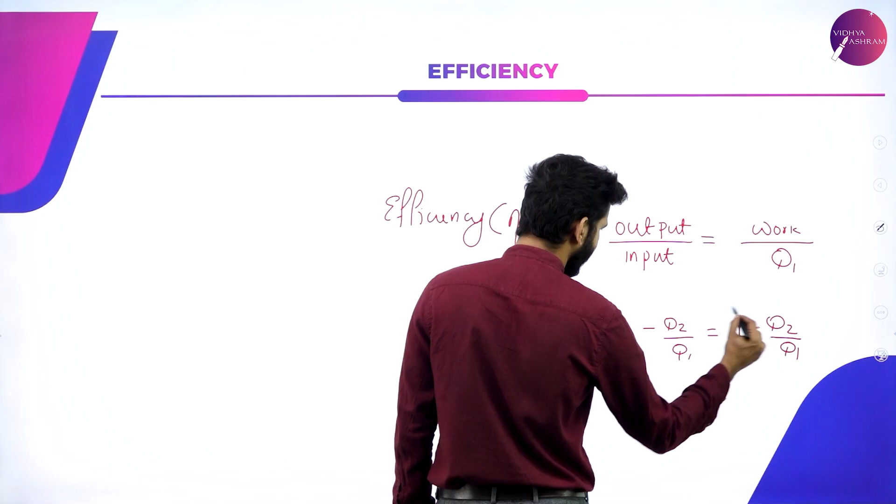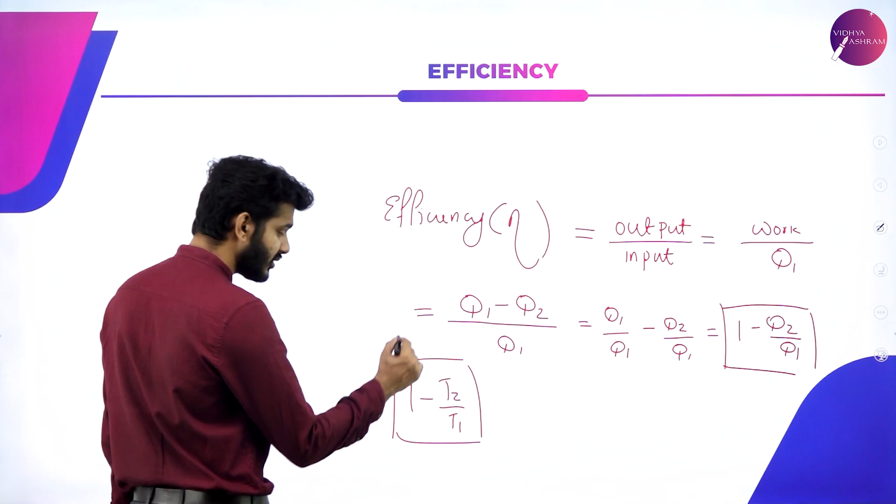That work done divided by Q1 will give us the efficiency. So I can write it as Q1 minus Q2, divided by Q1, which gives 1 minus Q2 divided by Q1. This is the equation for the efficiency of a heat engine, and mainly problems are asked from this equation. Instead of energy, we can also use temperature here: 1 minus T2 by T1 can also be used to represent the efficiency of a working heat engine.

That is all about thermodynamics in this particular session. You just have to remember that no engine is more efficient than the Carnot engine, because it is an ideal engine where the entire heat or energy given to the system is converted into work. But that is not actually possible. So working between two temperatures, T2 and T1, no engine is more efficient than the Carnot engine.